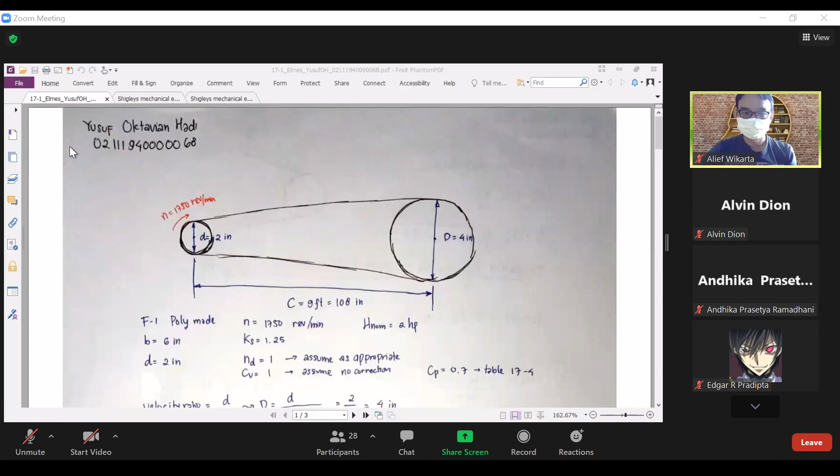I've shared screen. Okay, I will explain problem 17.1. In this problem, we know that...

A 6-inch wide polyamide F-1 flat belt is used to connect a 2-inch diameter pulley to drive a large pulley, given angular velocity ratio 0.5.

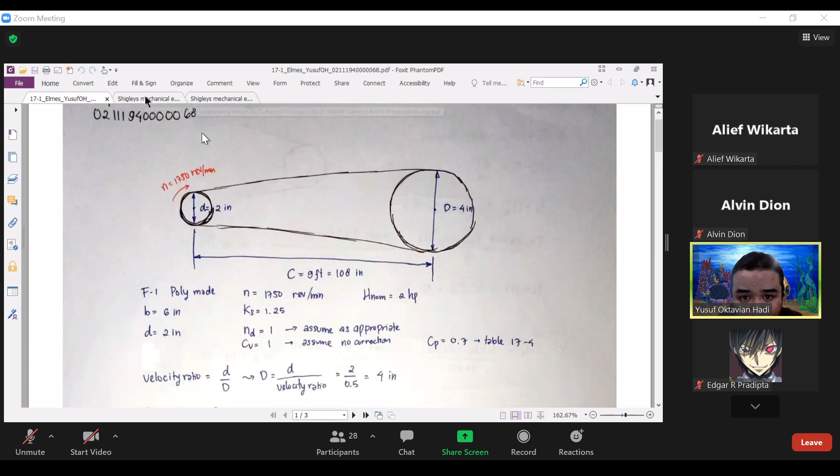It would be this: width is 6 inch, and this small pulley with velocity ratio 0.5. We used it to find the large pulley, equal to finding velocity ratio equal to small pulley per large pulley. So we could find large pulley equal to small pulley per velocity ratio.

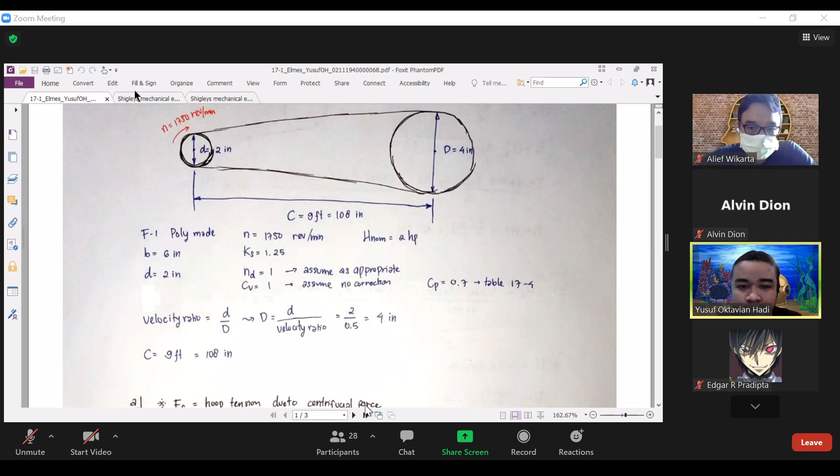And we find large pulley is 4 inch, and center to center distance is C. C is 9 feet, 9 feet change to inch is 9 times 12, so we could find it is 108 inch.

Small pulley have RPM 1750 rev per minute, and transmitted power, transmitted horsepower is 2.

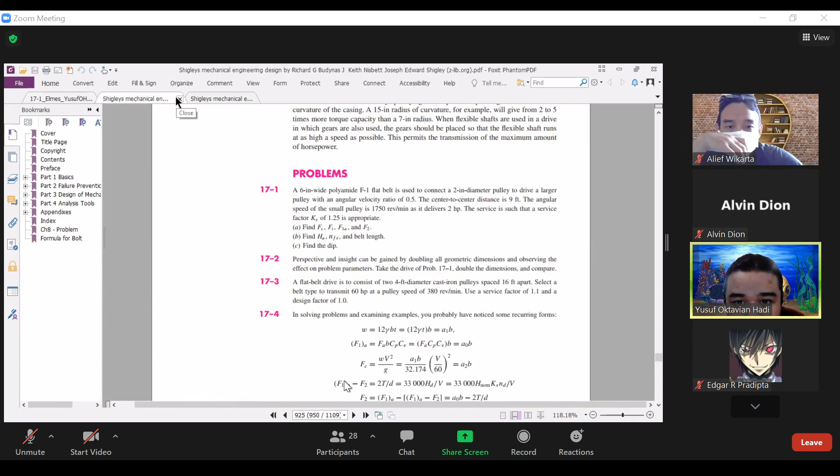The service factor KS is 1.25, and I assume that ND is 1 as appropriate, and CV is coefficient velocity, assumption no correction, and for correction CP is from table 17-4.

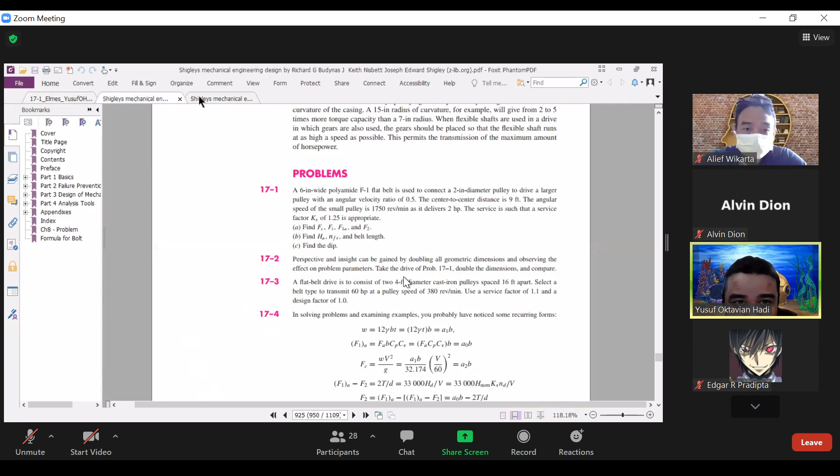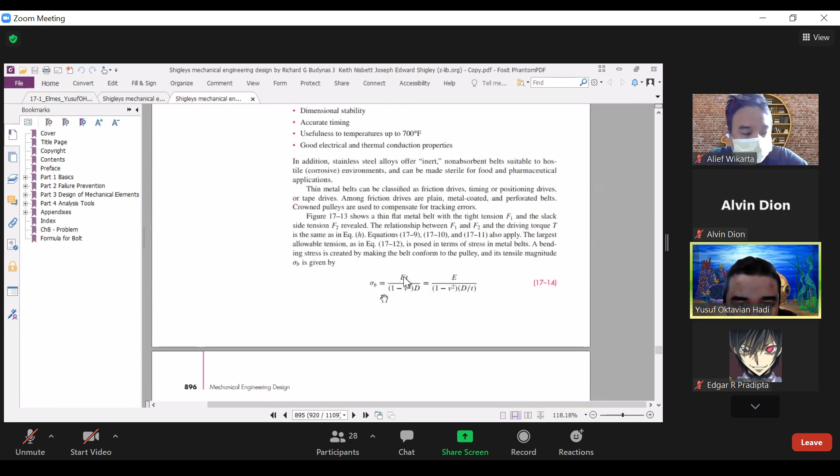CP is pulley correction factor, and from the given is polyamide F-1. And with small pulley is 2, so we use interval 1.6 to 4. So the CP is 0.7, and like this.

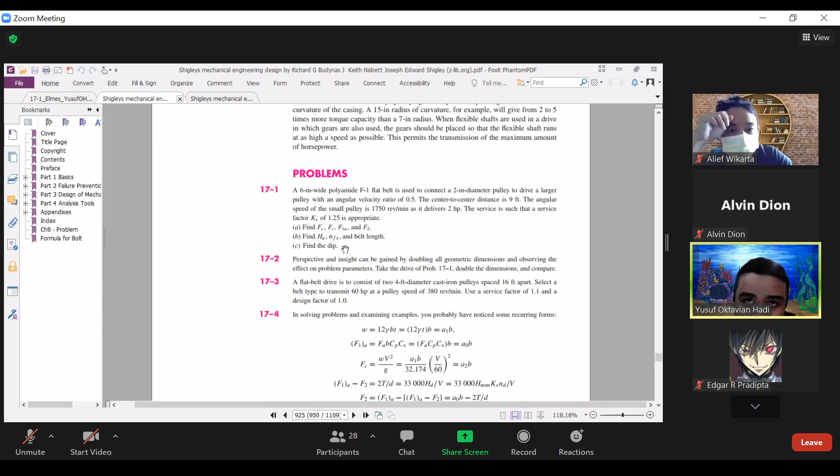What the problem needs to solve is find FC. FC is tension due to centrifugal force. Fi is initial tension. F1A is allowable largest tension, and F2 is loose side tension. At first we need to find FC, tension due to centrifugal force, and the equation is like this: FC equal to W

W is weight per foot of belt, per G is gravitational acceleration, times V is belt speed per 60, and about quadratic.

For G, we use feet per second, so G would be 32.17 feet per second squared, and for V we need to find it first.

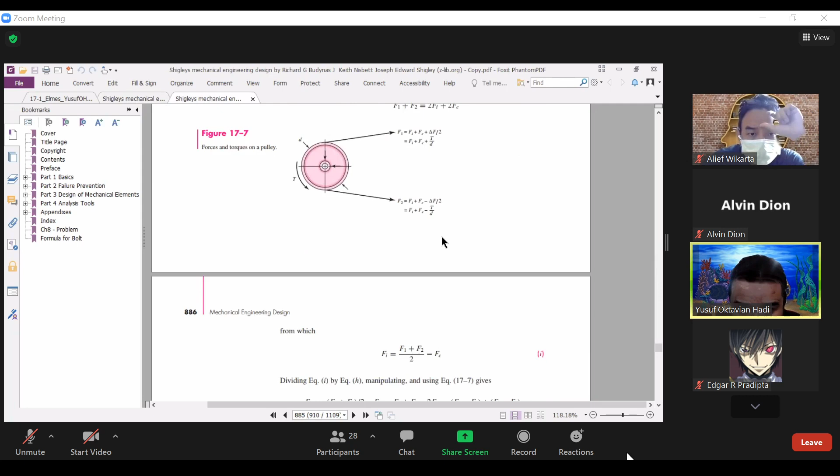Velocity is equal to PDN. Its equation is PDN in feet per minute, PDN per 12, so would be 1, and equal to 916 point 3

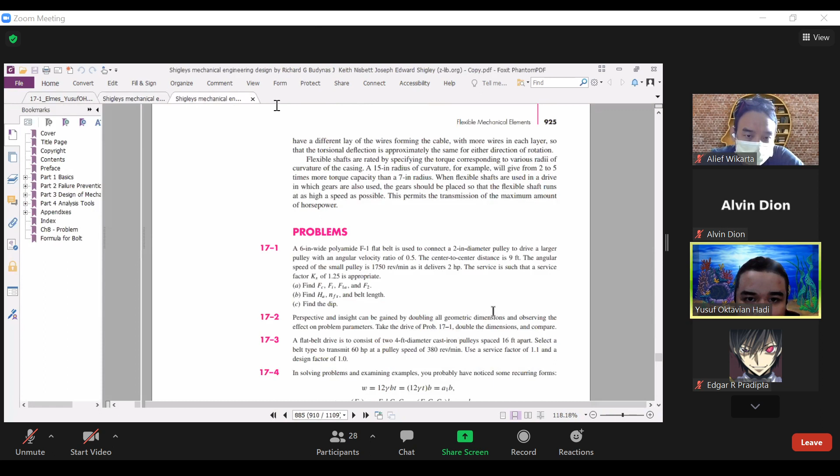And we could find from table 17.2 the other properties: T size equal to 0.05 inch, minimum pulley d min is 1, allowable tension per unit width is 35, specific weight is 0.035, and coefficient of friction is 0.5.

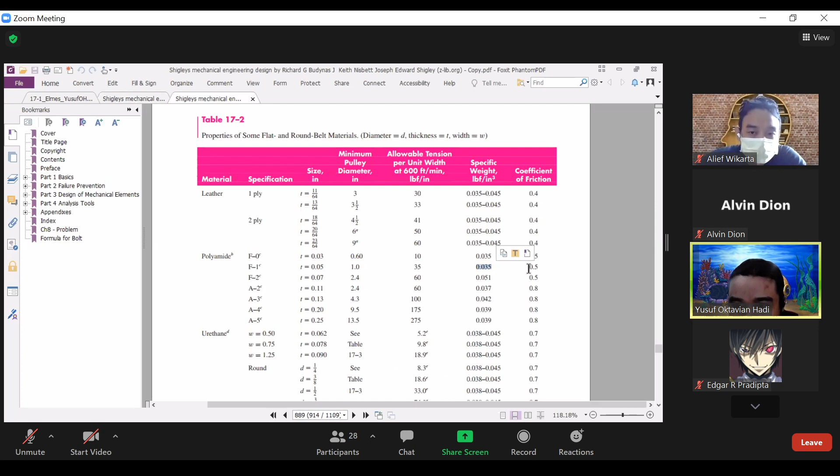So we could find W is equal to 12 times specific weight times width times the size, and equal to 0.126 pound force per feet.

From the result before, we could find FC is equal to 0.913 pound force, and we need to find what's next, the allowable large tension.

The allowable tension, it would be the equation like this, and B is width. FA is allowable tension, it's from the property before.

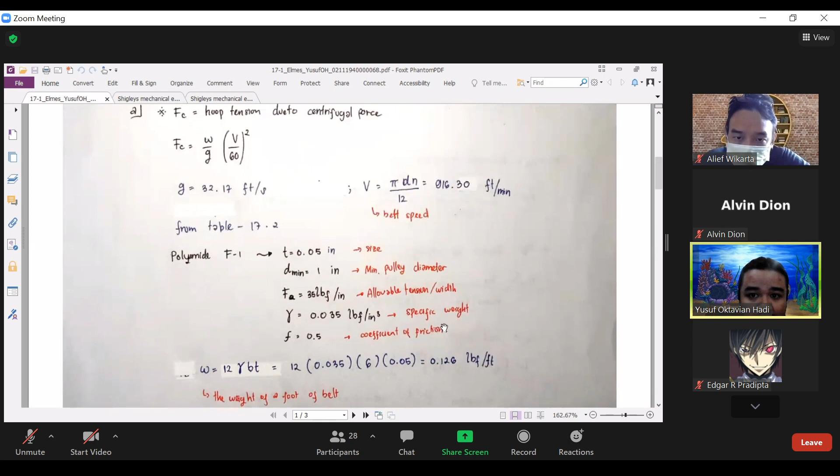And Cp is from table 17.4, and the Cv is assume no correction needed from the velocity, we assumed it 1, and so we could find 147 pound force. And F2 is loose side tension.

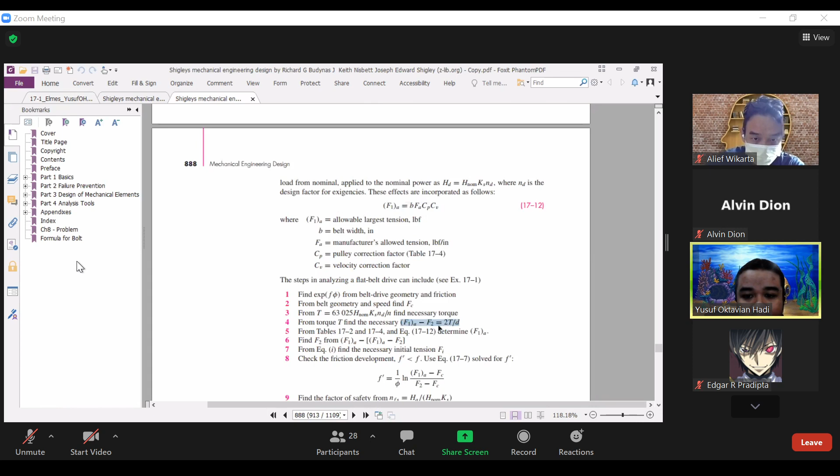Loose side tension is from this equation: F1 allowable tension minus loose tension equal to 2T per d.

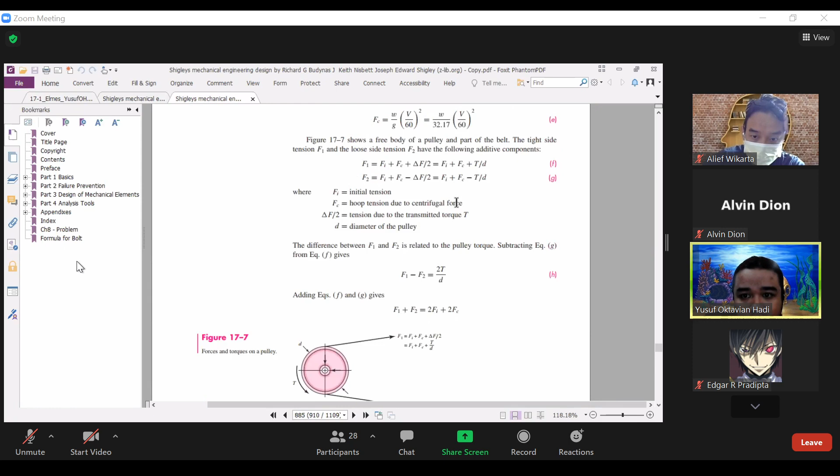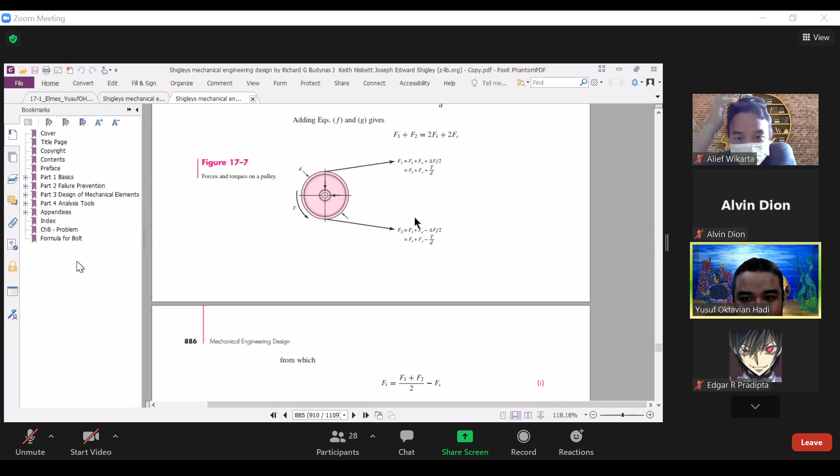T is torque. We could find it from this, torque is from this equation, is 63,025

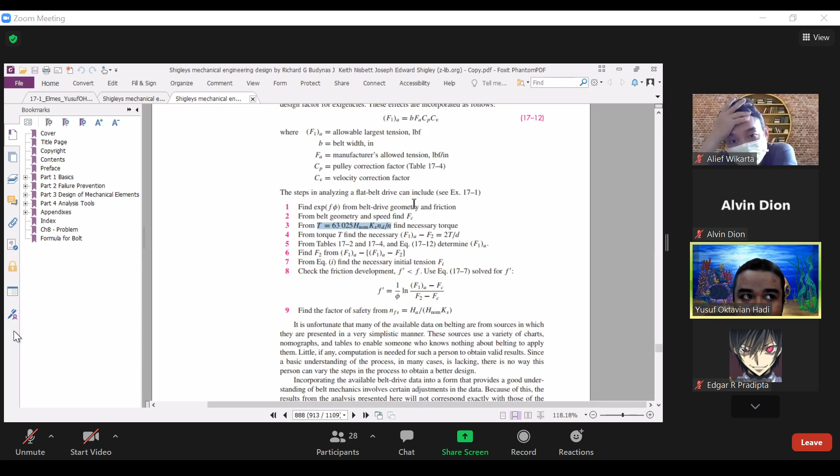times H normal, transmitted horsepower nominal, times KS surface factor, times ND per N is revolution. So we could find it is 90 pounds force times inch.

And from this equation we could find F2 is 57 pound force. And the next is to find the initial tension.

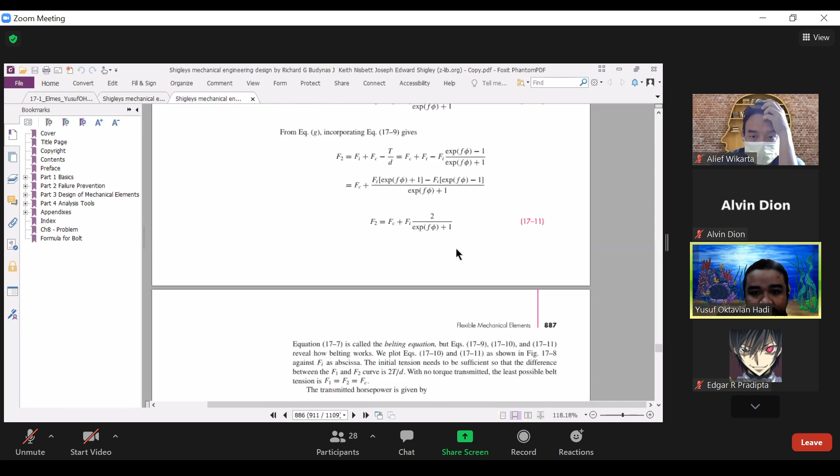Initial tension is from this initial tension equation, so we could find 101.1 pound force.

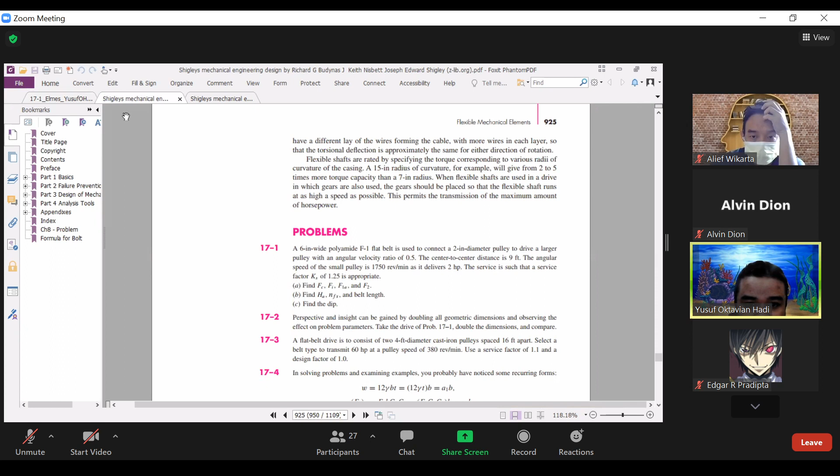And the point B, we need to find allowable transmitted horsepower, and FS is factor of safety and belt length.

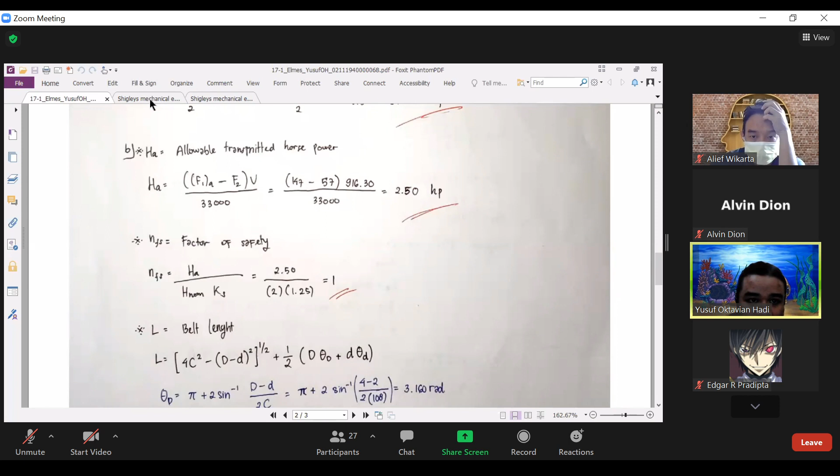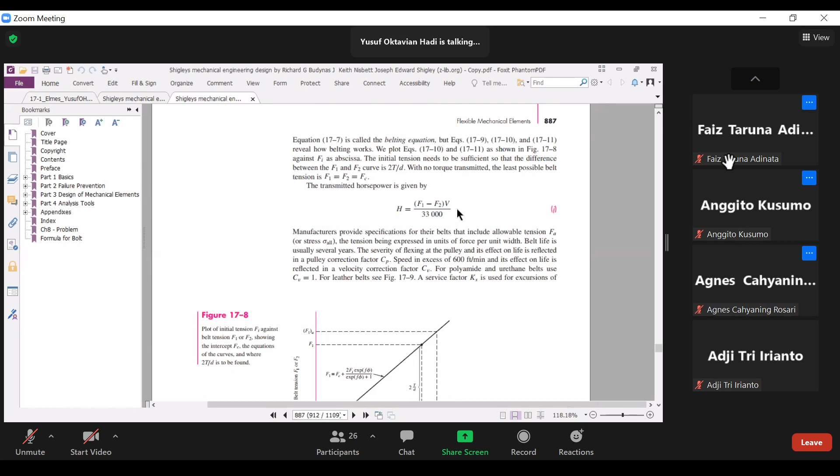For allowable transmitted horsepower, it's from the equation: horsepower is F1 minus F2 times V per 33,000, and we can find equal to 2.5 horsepower.

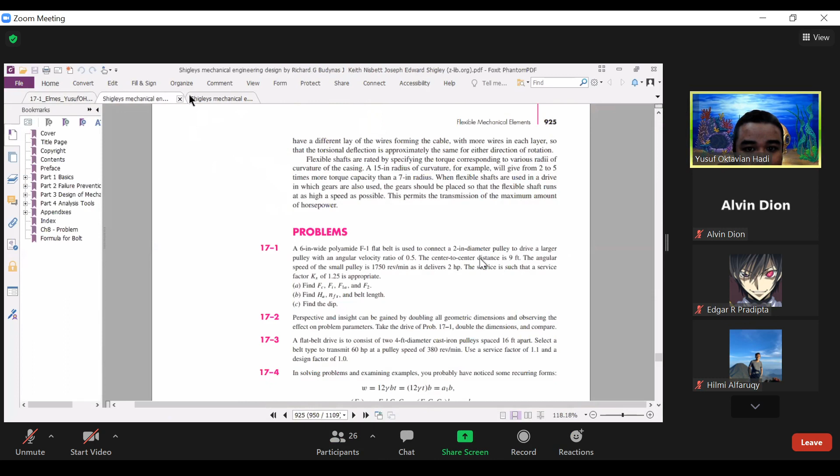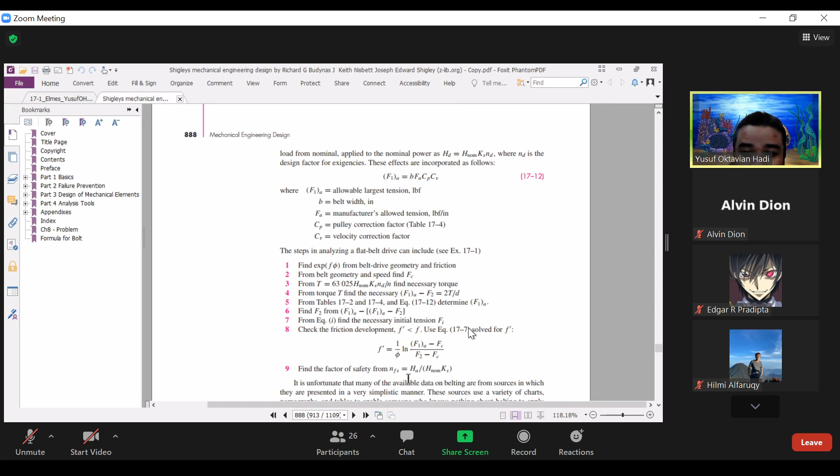And factor of safety is found from this: allowable horsepower, transmitted horsepower per transmitted nominal times service factor, and we could find it is 1.

And for the belt length, from the equation, this is the length of belt not crossed, so we use 17.2, equation 17.2: 4C squared minus (D minus d) squared per 1/2 times power 1/2, plus 1/2 times d and theta for large pulley, plus diameter small diameter times

theta small pulley. Now we need to find theta first. Theta for large pulley is equal to pi plus 2 sin power minus 1 of d min

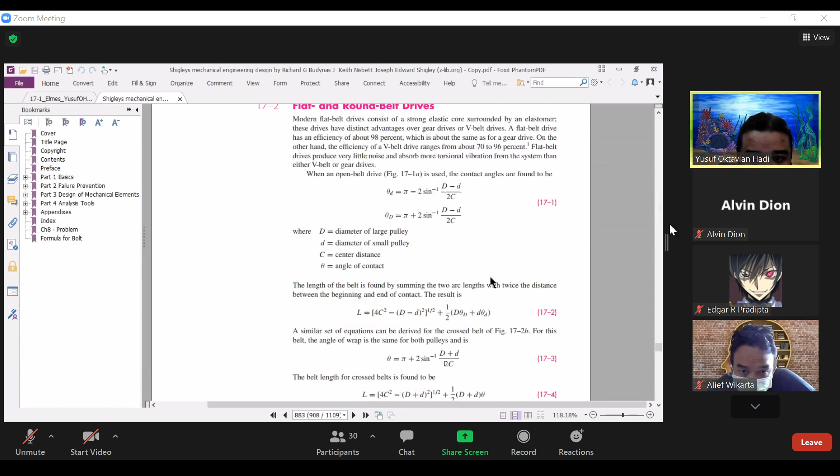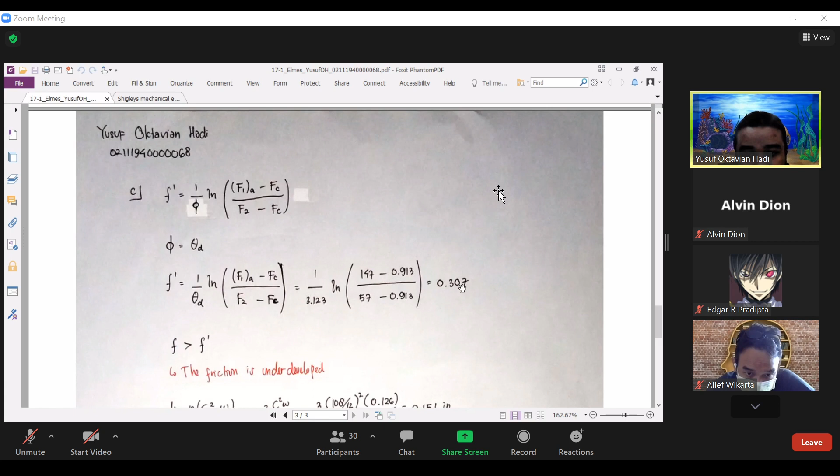The friction is equal to 1... equation, and since it is transmitted from the small pulley, we use theta small pulley, and it would be like this, and we could find it is 0.307, and from the property before, the coefficient of friction is 0.5.

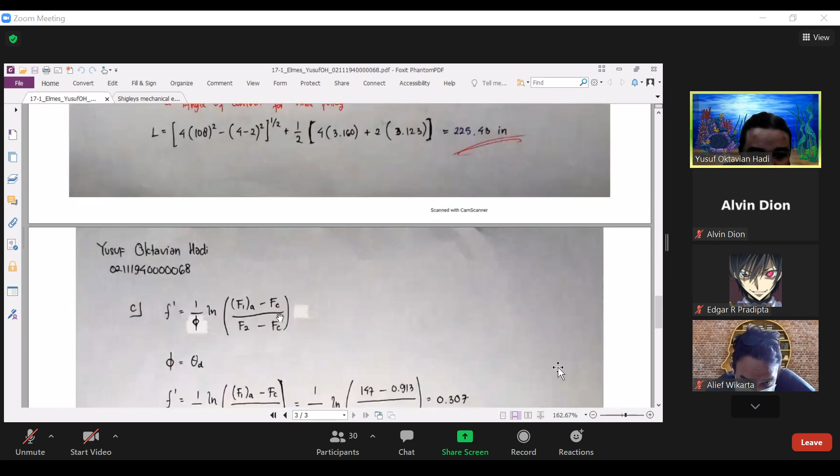So from the result we find, it will be smaller than the coefficient of friction, so it would be underdeveloped as it is suitable, or like so.

And the equation of depth is 12 times c squared times w per 8 times Fi, is initial tension, and we can simplify it with 3 times c squared times W per 2 initial tension, and we find 0.151 inch would be like this.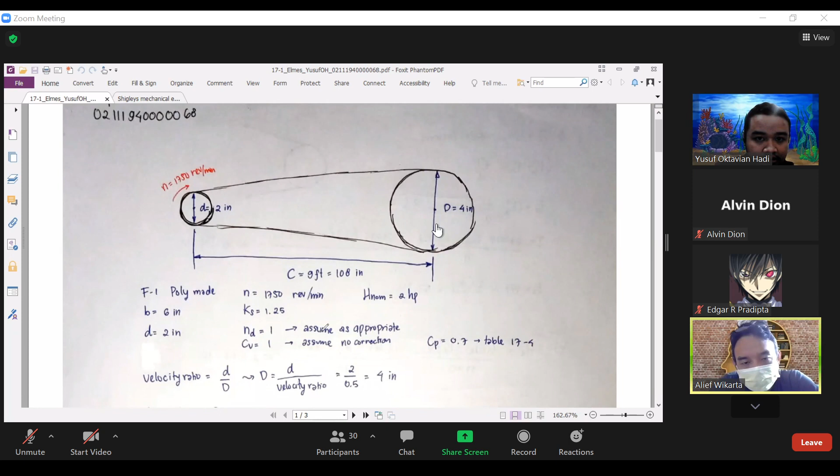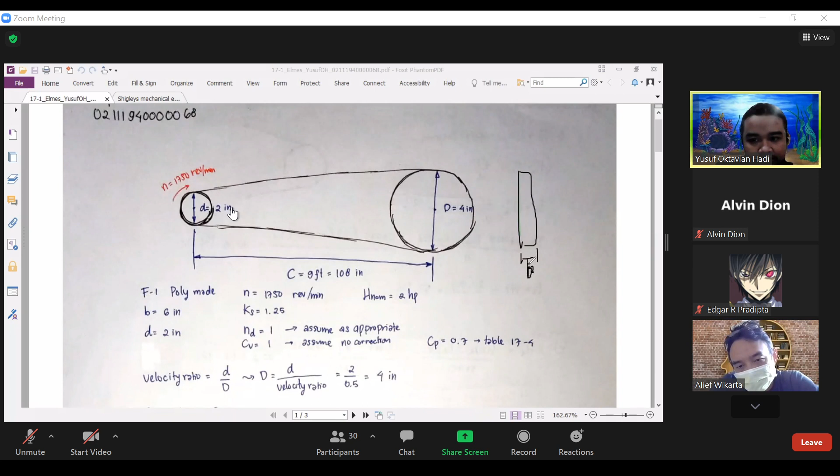So could you sketch it? Could you draw the... and wait, pulley with diameter 2 inch? Like this, sir. That one is 6. And where is the 2 inch? 2 inch is this, the diameter of the small pulley.

Okay, in your figure, the width is 6 and the diameter is 4. Is it correct? I mean, 6 is higher than 4, right? And in your figure, 6 is small, and b is smaller than the diameter. Excuse me. The information: 6 inch, D is equal to 4. Yeah, D equal to 4. And yes, b is equal to 6 inch.

And width is equal to 6 inch. So if we want to sketch the belt and the pulley, will it be like your figure or not? In your figure, the diameter is smaller than the width, right? Sorry, higher than... the diameter is greater than the width. But actually 4 is less than 6, right? Yes. So could you sketch the belt, the diameter, and the pulley?

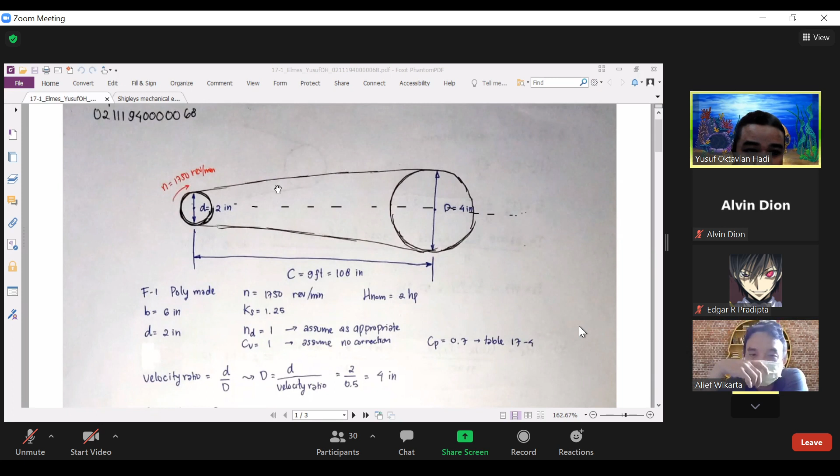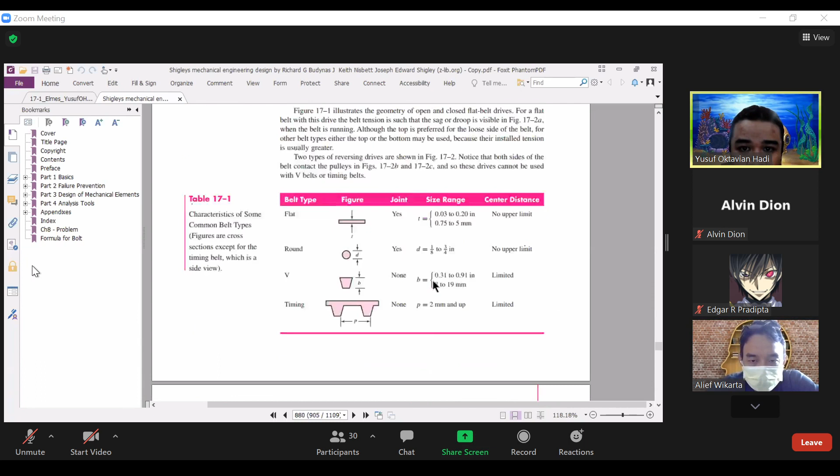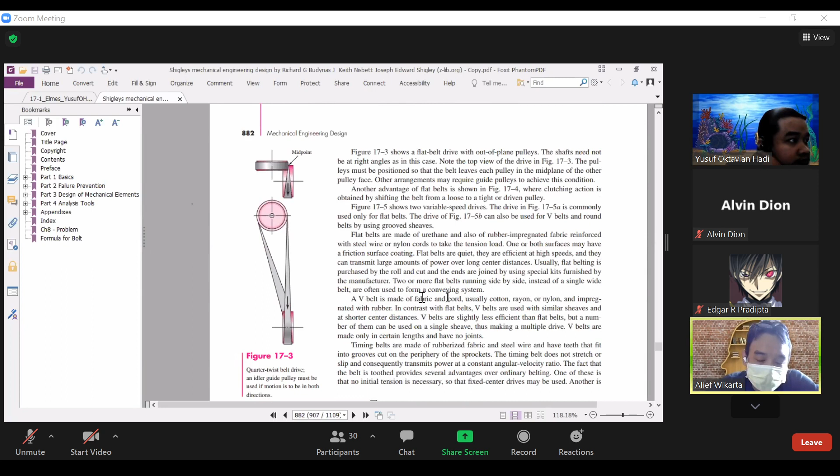In this, I'm not sure if I need to draw it, up to you. This annotated is okay. Or maybe in the textbook you can find one figure that represents your problem. That's also okay. I just want to know if I find it before. Or maybe you can find it in Google, I just want to know.

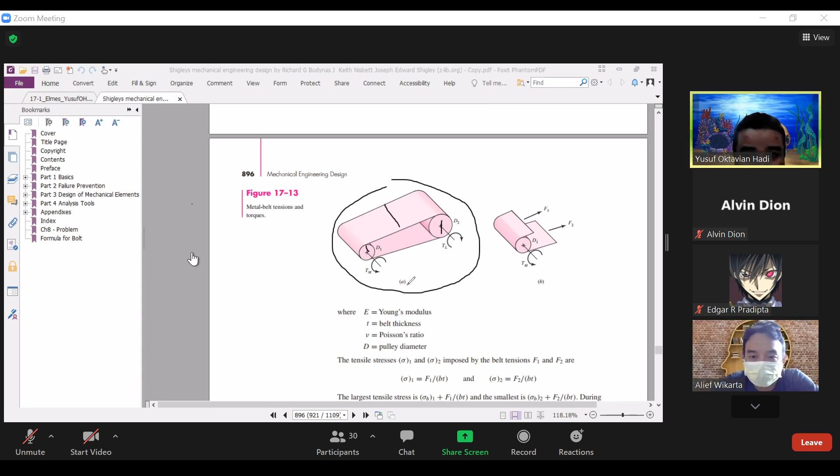Would it be like this, sir? Which one? Like this, with width 6 would be like this. We could assume that it's 6, and it's 2, and it's 4. Okay, okay, so should be like that one, yeah. Maybe it's not that, but the width is 6 and the width is higher than the diameter, yeah. Yes, the width is higher than the diameter. Okay, okay, that's good.

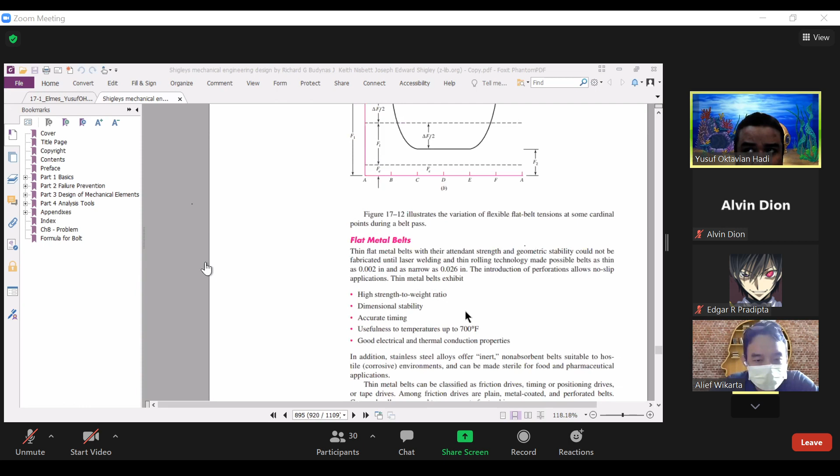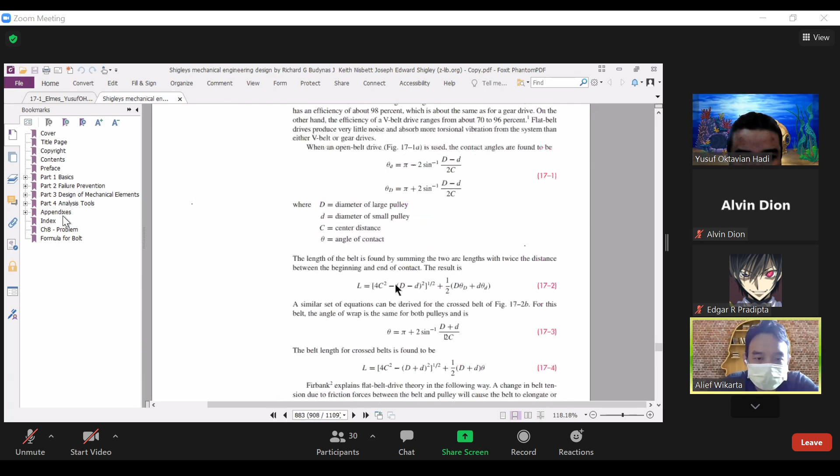Next, what is the definition of initial tension? And how did you get the initial tension value? Initial tension mean... tension, like for tension, for like, yeah, yeah.

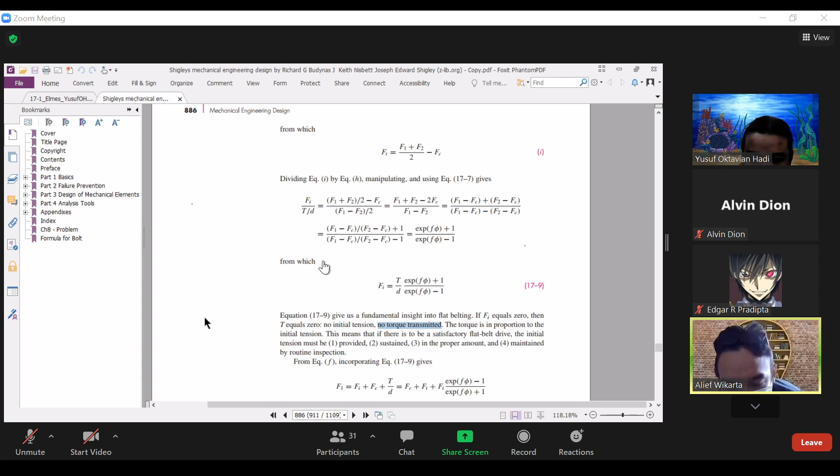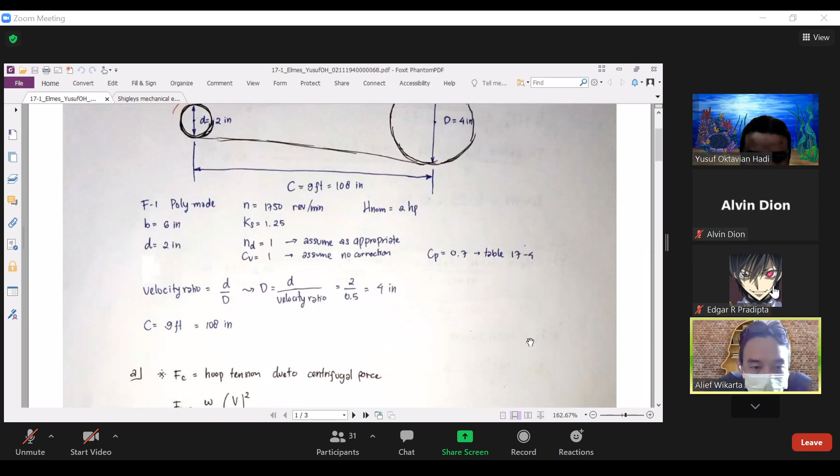Next one, next page, go to the next one. Okay, after you got the initial, okay, so like this one, what's the, okay stop. What's the meaning of allowable transmitted horsepower? Allowable transmitted horsepower is horsepower.

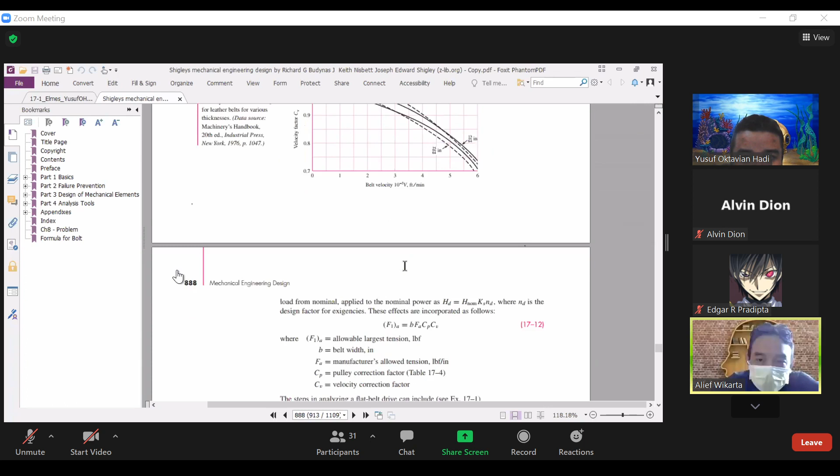In the problem, it said that the small pulley has 1,000 something revolutions per minute, and it delivers 2 horsepower. So in the problem, it's already said that horsepower is 2 horsepower, and here you got another horsepower. You said here is the allowable transmitted horsepower, and the value is higher than 2 — here it's 2.5 horsepower. So what's the meaning of this allowable transmitted horsepower, and what's the difference between this 2.5 and the other horsepower stated in the problem?

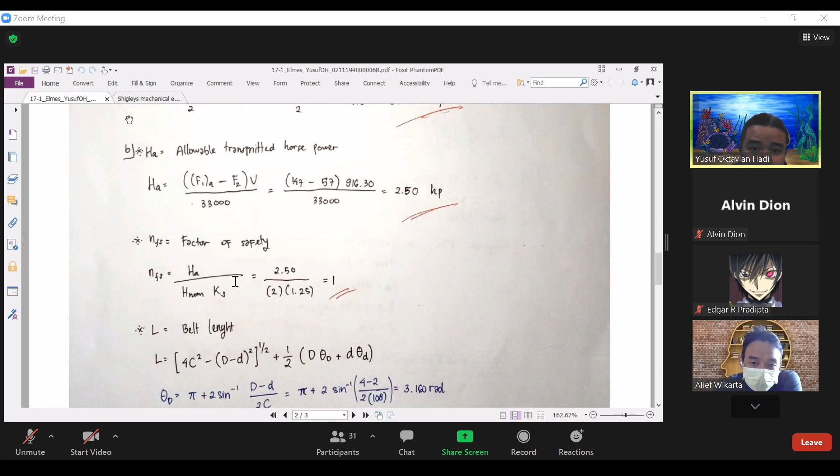It mean berarti allowable-nya lebih kecil. Allowable-nya berarti lebih kecil kalau misalkan di 0,5 berarti kan yang allowable horsepower-nya transmitted horsepower-nya lebih kecil dari yang itu berarti apa? Berarti yang allowable itu lebih kecil dari yang kondisi yang bekerja saat ini, nominal itu yang ditampilkan saat ini Pak. Berarti kemungkinan maksudnya tidak aman gitu Pak. Mungkin seperti itu.

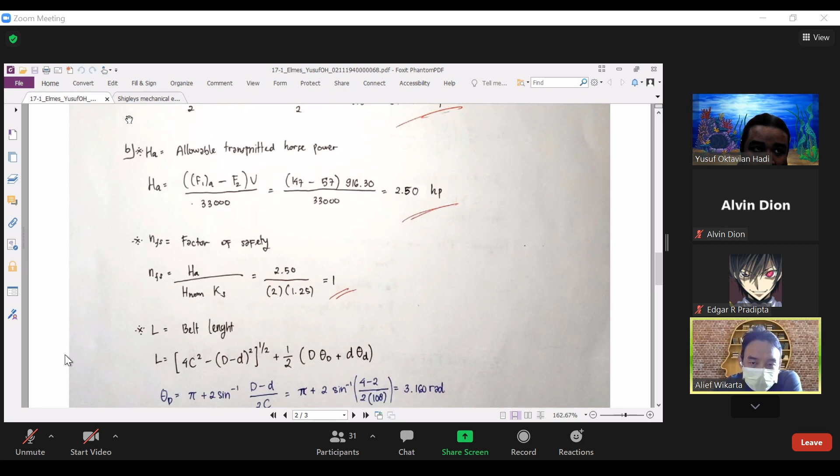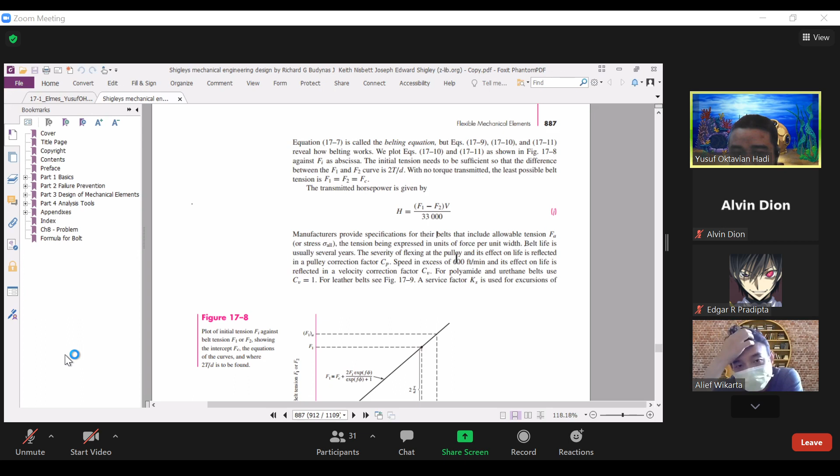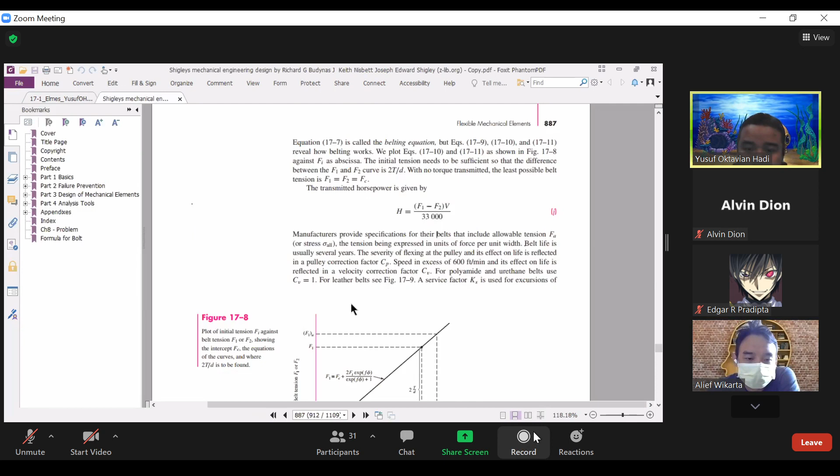Oke lah. Terus kalau nextnya DIP lewat DIP. DIP itu ini Pak, DIP itu seperti kayak defeknya gitu Pak. Jadi kan ini kan enggak itu sepenuhnya di press gitu Pak. Jadi ada kayak apa sih namanya itu kayak defek.

Apa sih? Bukan defek. Apa itu namanya? Apa sih yang kayak ditekan itu Pak. Diberikan gaya pada beltnya itu kayak jarak dip itu kayak jaraknya itu Pak, jarak kan kalau misalkan tuhnya beltnya itu mengalami tekanan gitu jadi kayak tidak sepenuhnya ketat gitu Pak, ya seperti itu ya jelas mudahnya itu lebih ke ya Pak,

Itu seperti deflectnya Pak, deflect dari beltnya itu Pak yang membentuk curve itu. Nah, jadi dip itu dari ketika keadaan lurus ke keadaan curve itu, Pak.

So, ada nilai tertentu yang perlu dipenuhi gitu untuk dip itu? Atau enggak? Maksudnya gimana, Pak? Maksudnya nilai tertentu itu dari formulanya atau dari ketentuannya, Pak? Ketentuannya.

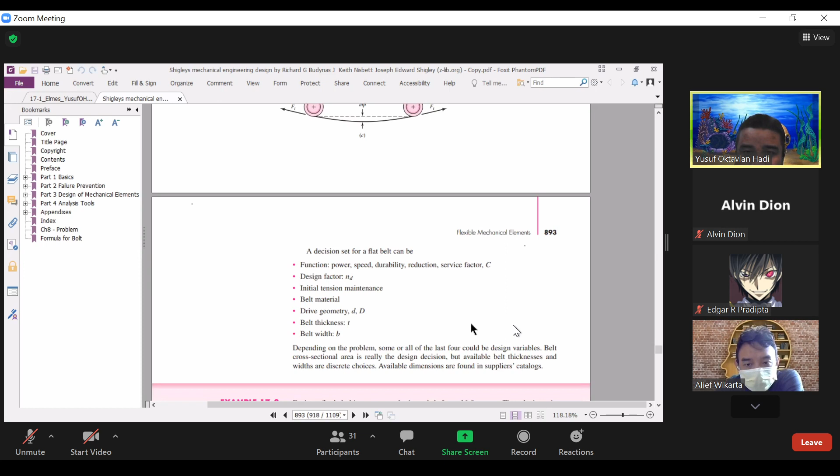Kalau menurut saya mungkin DIP ini terpengaruh dari beberapa, karena DIP itu berdasarkan inisial factor, inisial dari beltnya itu sendiri yang pakai yang isinya itu bukan dari inisial tensionnya, mungkin ini berdasarkan itunya, Pak, lebih ke tergantung dari penggunaan mungkin, Pak. Kalau itu pemahaman saya, Pak. Kalau didasarkan dari formulanya itu, Pak. Tadi disesuaikan.

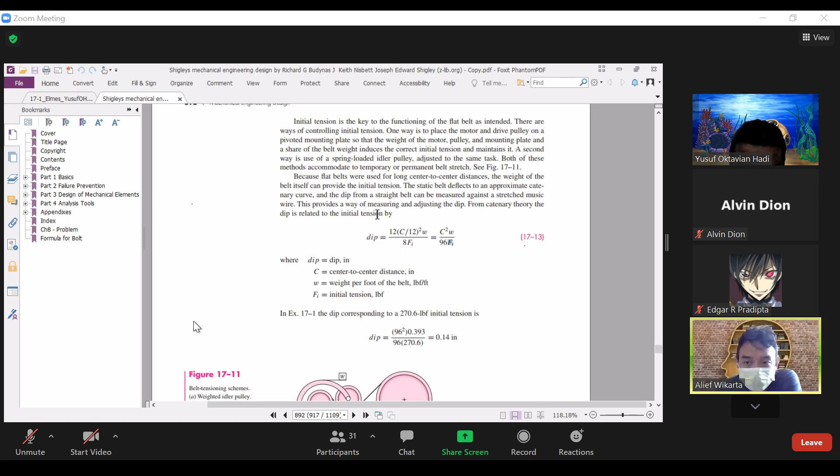What will happen if the, let's say the width of the belt is reduced? If we reduce, if we have a smaller width, and then what will happen with a smaller width, to the dip?

It, it's dip smaller than before. Smaller? Why? Width, not weight. Width. Oh, wide. Oh, wide. Wide of the wide mean. Wide mean B. B. B. B. Yeah, B.

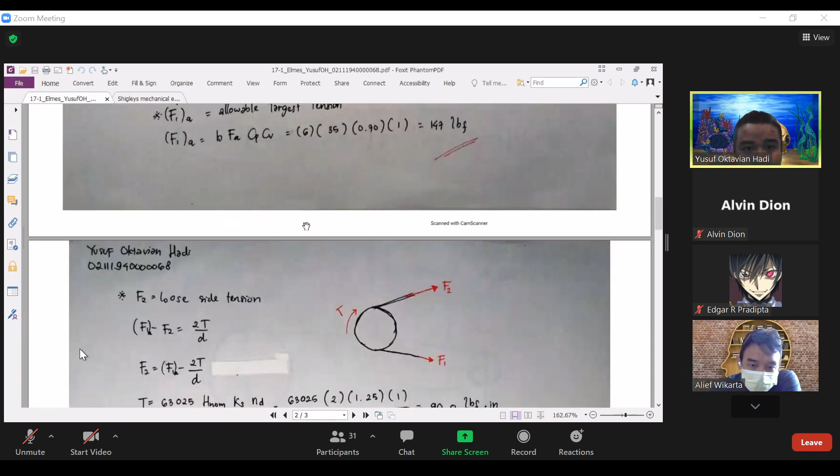Oh, it mean it will be, dip will be larger, larger. So, if B, if B smaller, yes sir, or the width is smaller. If, so that's why. If B is smaller, mean oh, if B is smaller is mean

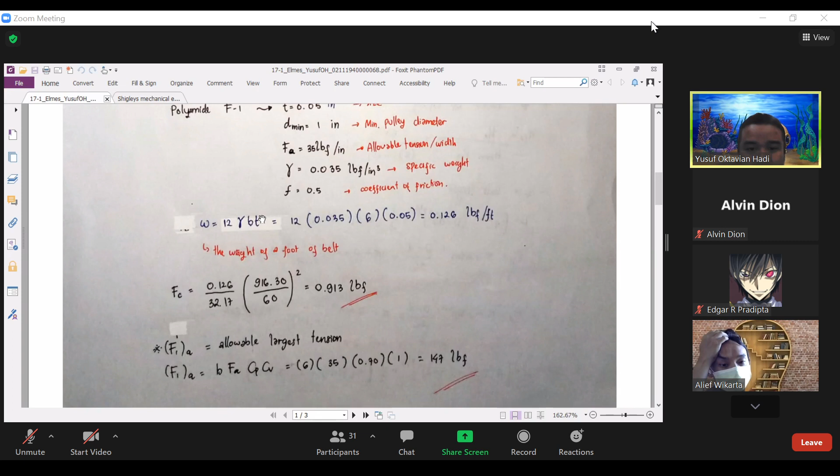The dip is, D is more. I think this dip is smaller cause we need to find W, we need 12, we need use this equation and B, if B is smaller it means the dip is, jadi ikut dipnya juga ikut mengecil, Pak. Mengecil ya.

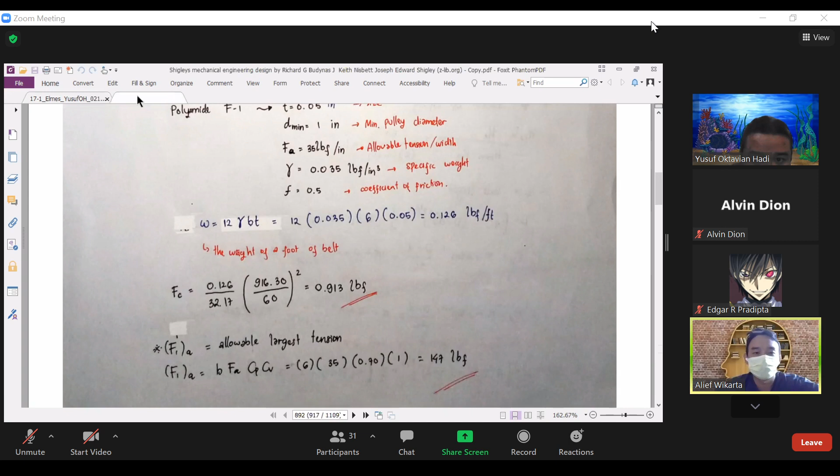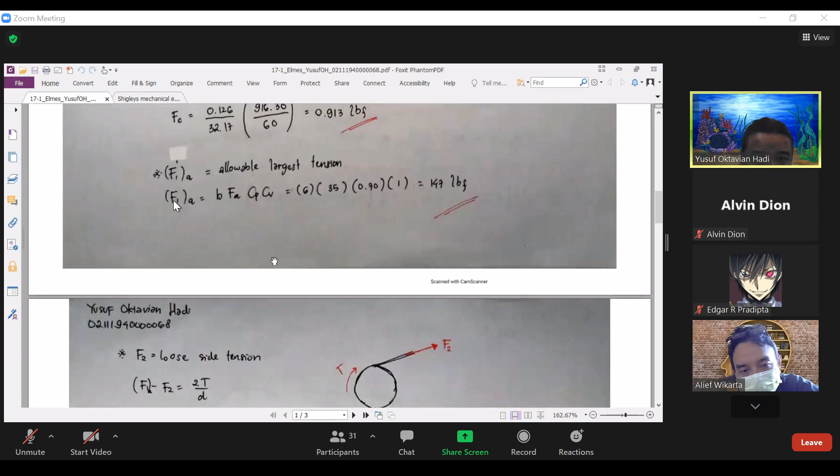Terus nextnya. Oh, tapi iya, Pak. Tapi juga itu juga, tapi kalau saya lihat itu juga mempengaruhi ini juga, Pak, karena yang F1 ini F1 yang F1A allowable largest tension juga membutuhkan ini juga, Pak, membutuhkan FI pun juga ikut terpengaruh. Tapi pengaruh lebih besarnya lebih ke itunya, Pak, ke W-nya. Oke.

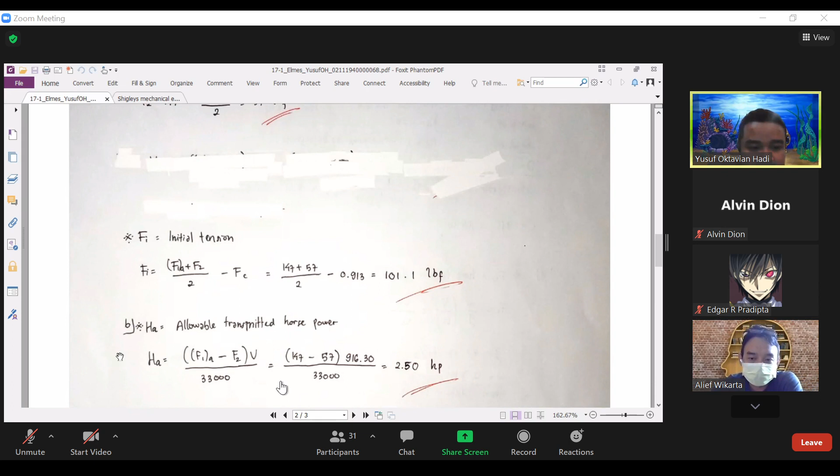Any question? Excuse me, sir. Yeah, Mas Iqbal. Sorry that I didn't turn on my camera, sir.

So I have one question, sir. Like in the answer Mas Yusuf, that the safety factor is 1. Is it mean that the belt has a standard safety, sir? Because it's 1. It's still appropriate. It's okay if we want to use that belt with a safety factor equal to 1. Oh, okay, sir. But if we can get a higher value, maybe 1.1 or 1.2, it will be better. Okay, sir. I see. Thank you very much, sir.

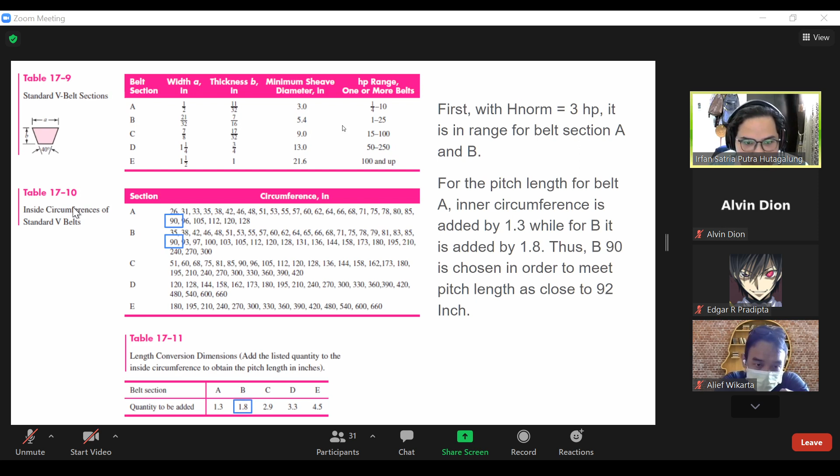After that, we find the center-to-center distance of the V-belt with the formula 17/16D. Then we find the angle of contact for the smaller diameter sheave using pi minus 2 sine inverse of (bigger diameter minus smaller diameter) divided by (2 times center-to-center distance). It is found to be 2.957 radian, converted to degrees as 169.42 degrees.

After that, we find the belt speed in order to find the power from the table. The belt speed uses the same equation as before: V equals pi times smaller diameter times revolutions per minute, divided by 12 to convert from inch to feet. It is found to equal roughly 5,000. Using table 17.12, with belt speed 5,000 and belt section B, we find H tabulated, and it is found to be 4.00.

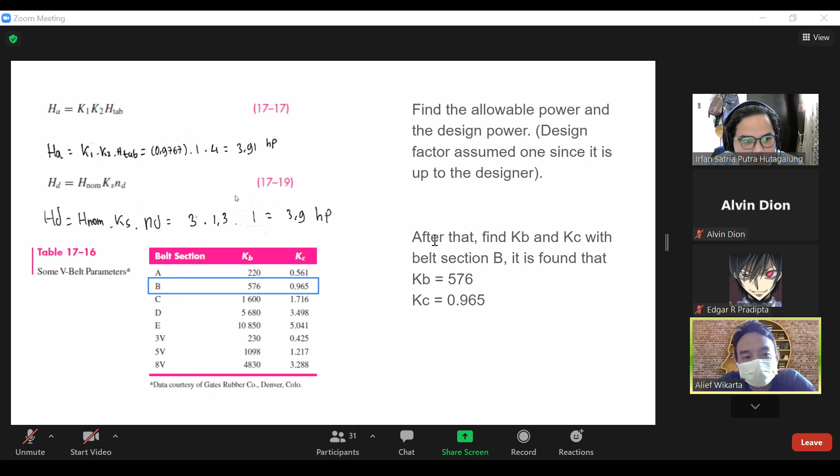From what I did in this problem, I think that H allowable is the power defined by the theoretical design of the V-belt itself, since the equation uses mostly factors and the H from the table, while the nominal is the known actual power of the to-be-designed V-belt, sir.

Sorry, what's the definition of nominal? Nominal is the power that is known, maybe I'll use Bahasa, sir, is it okay?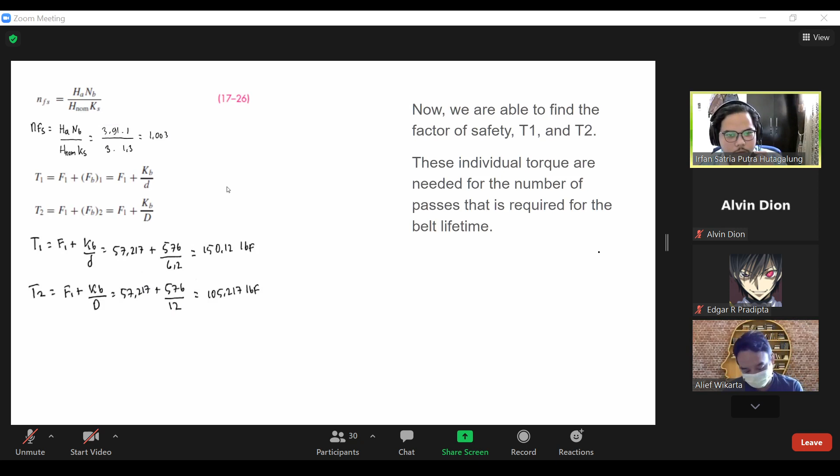Okay, and I will continue. Since we already know the torque for the first and the second diameter, then we can find the lifetime. First, we can find the number of passes using this equation from the book, equation 1727. With that equation, we have found that it will be 6.72 times 10 to the power of 9 passes.

And then we can use this equation, T equals NP times LP per 720 times V, where NP is the number of passes, LP is the pitch length, and V is the belt speed. The reason why I only use 10 to the power of 9 is that it is told in the book, if it exceeds 10 to the power of 9, only use NP equals 10 to the power of 9.

So I use this formula, and then it is found that the lifetime of the belt will be 25,340 hours, or 2.9 years of lifetime. That is it for this problem, sir, for me.

If the belt lifetime is 2.9 years, is it okay or not? Does the problem say something about lifetime? For the problem, sir, it only asks, it does not give the requirement for how many hours it is.

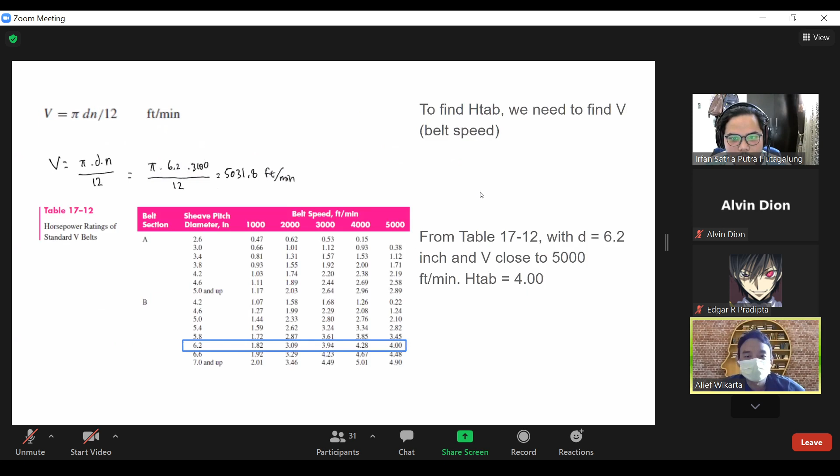Okay, how did you know that 25,000 something is equal to 2.9 years? Oh, for that I use a calculator, sir.

Yes, one day equals 24 hours, and one year equals 365 days. Okay, so it means this V-belt and the pulley are working 24 hours. Yeah. Yes, sir. Okay.

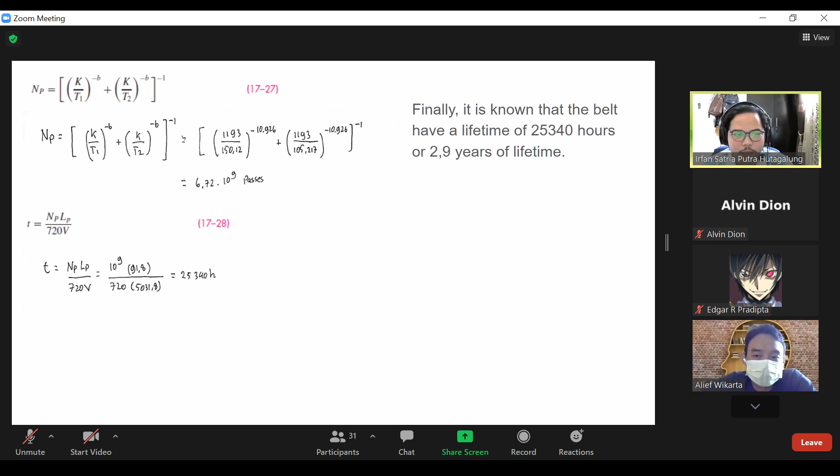So, Mas Irfan, what is the difference between V-belt and flat belt, in your opinion? From my opinion, sir, other than the dimension. Of course the dimension is different, the geometry is different.

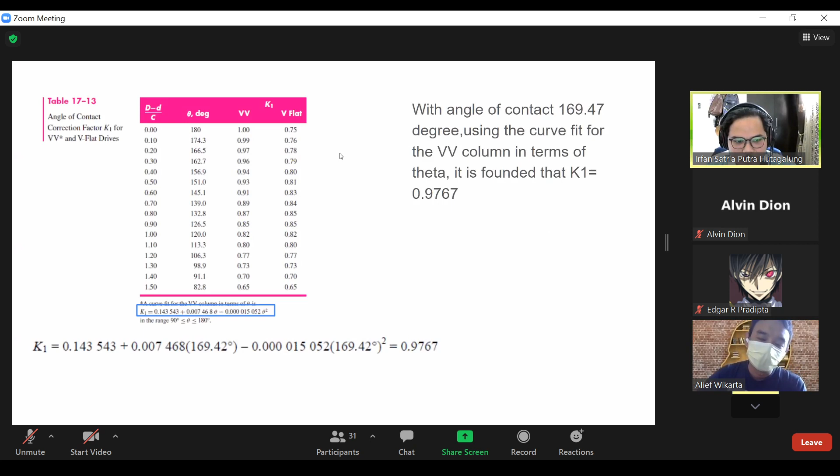What's another difference? For me, the difference is that it does not have a... how do I say, Bahasa Indonesia, sir, maaf ya. The gap, when it stops. So I think that it always has tension.

No, I mean for the practical implementation, if we have two pulleys with a long distance between them, we can use V-belt or flat belt. I think it will be better if we use flat belt rather than V-belt, for two pulleys with a long distance from each other. So center to center distance is very big.

I think it will be better to use a V-belt, sir. Why? I don't know, if I remember correctly, the flat belt uses friction in order to move, it uses high friction, while the V-belt uses a groove from the pulley. So I think with a longer center to center distance, the energy losses will be bigger if we use flat belt.

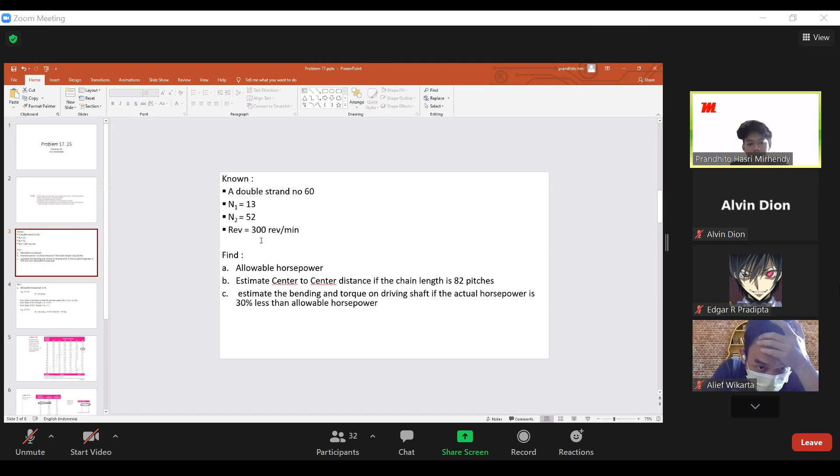Untuk known-nya ada double strand number 60. Untuk number pitch-nya, number tooth-nya itu N1 ada 13 dan N2 52. Untuk N kecilnya revolusinya itu ada 300 revolution per menit.

Untuk yang pertama, mencari allowable horsepower itu adalah HA. Di buku untuk mencari HA ada di equation number 37, di mana HA itu adalah K1 kali K2 kali H tabel. Untuk mencari H tabel pertama-tama ada di tabel 1720. Untuk sprocket speed revolution per menitnya ada di 300 dan chain numbernya 60. Menemukan untuk H tabelnya ada di 6,2.

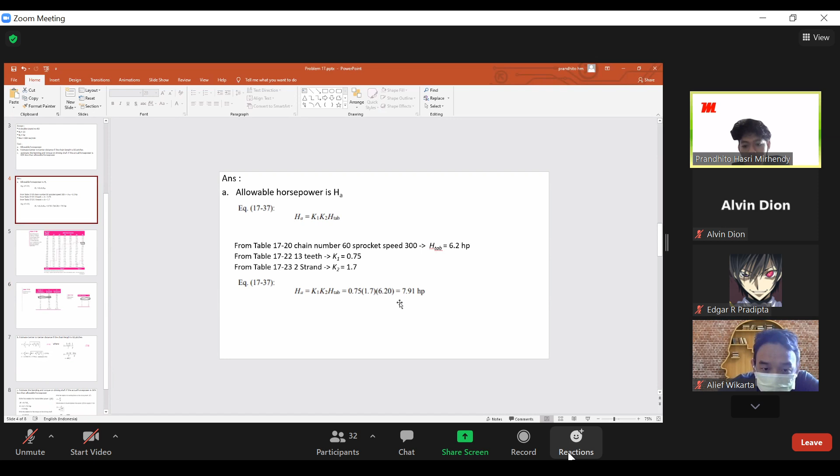Lalu untuk mencari K1-nya memakai tabel nomor 1722, di mana number of teeth-nya itu 13 dan memakai K1-nya 0,75. Untuk yang K2, multiple strand factors, number of strands-nya 2 karena di soal sudah menunjukkan multiple strand, jadi memakainya K2 1,7. Setelah itu masuk ke persamaan 1737-nya tadi, di mana HA sama dengan K1 kali K2 kali H tabel. Untuk angkanya sudah diketahui semua, jadi untuk HA diketahui 7,91 horsepower.

Setelah itu, untuk pertanyaan yang kedua, yang B, itu estimate center to center distance if the chain length is 82 pitch. Di mana di buku telah dijelaskan untuk equation nomor 1735 untuk mencari center to center distance-nya itu dengan rumus P/4 kali minus A ditambah akar dari A kuadrat min 8 N2 min N1 per 2 Pi kuadrat. Di mana A sendiri memiliki rumus dari buku di equation number 1736 itu sendiri A-nya sama dengan N1 plus N2 per 2 dikurangi L per P.

Di sini bisa diketahui untuk L-nya sendiri itu adalah 82 pitch, jadi A-nya sama dengan 13 tambah 52 per 2 dikurangi 82P per P. Dihasilkan minus 49,5. Lalu bisa langsung masuk ke equation 1735 tadi, di mana C sendiri sama dengan P per 4 dikali minus 49,5, minus 49,5 jadi positif, ditambah minus 49,5 kuadrat min 8 kali 52 min 13 per 2 Pi pangkat 2. Bisa ditemukan untuk C-nya yaitu 23,95 P, di mana P sudah diketahui di tabel yang ada di buku.

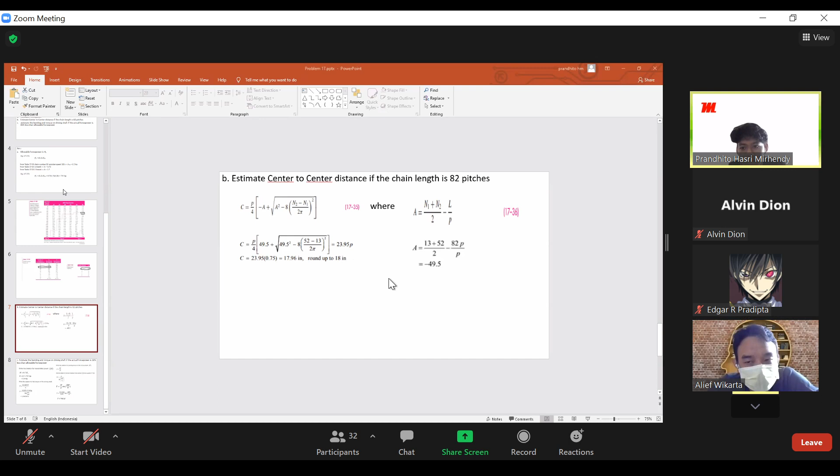Oke, ada pertanyaan? Saya mau bertanya, Pak. Oh, monggo Mas. Di sini kan untuk mencari K1-nya itu lewat tabel 17.22, di mana untuk tabel itu ada pre-extreme sama post-extreme horsepower. Saya masih bingung buat menentukan pre-extreme dan post-extreme itu aslinya dari mana Pak, kapan waktu pakai pre-extreme, kapan waktu pakai post-extreme.

Kamu pakai yang apa? Saya pakai pre atau yang post? Pre-extreme. Itu soalnya juga saya bingung kan Pak. Terus waktu lihat example 17.5 itu pakai pre-extreme. Jadi saya ikutin 17.5 itu Pak, saya juga nggak tahu nih pakai yang mana, apa ya, pre-extreme?